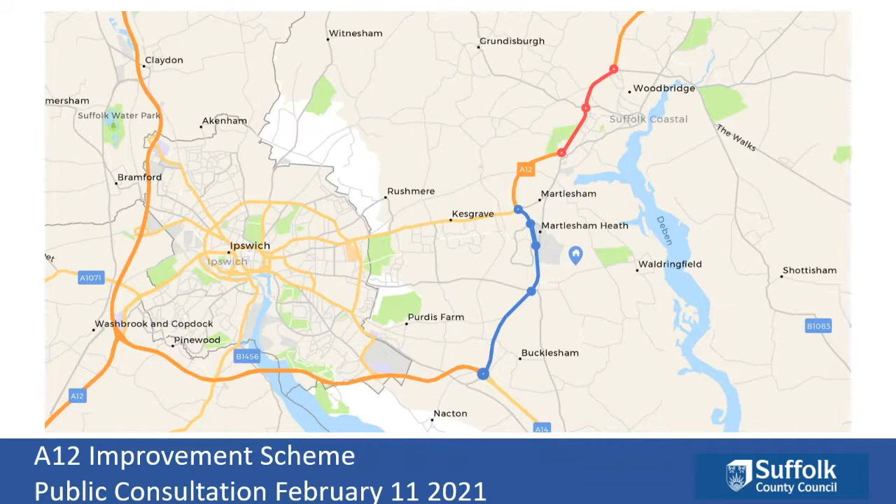So it is the A12 improvement scheme. As I say, consultation started on Tuesday. The A12 is part of Suffolk's major road network. There are a handful of major road network status roads in Suffolk, and they tend to join to the strategic road network. So in this area, it'd be the A14. As a major road network route, it recognises the importance of the route not only for the local communities and businesses, but also the economy, particularly in this area, the visitor economy, and the A12 as a prime access to

the energy coast. So in looking at where to do improvements on the A12, we looked at existing issues and how they might get worse based on planned growth. So we did some modelling in response to recent local plan updates, and it showed that this particular stretch of the A12 that we're looking at in the project, the issues there would get worse. And the obvious question is, why now? You know, this has been an issue for some time, and that really comes down to opportunity.

The Department for Transport, up until very recently, in fact until the major road network was established, there wasn't really the opportunity to put forward projects of this sort of size and cost, and that limiting factor in the funding opportunities meant that looking at schemes like this was not possible. So the current funding for the major road network runs from 2020 to 2025. So that's looking at schemes to be substantially complete by 2025. In 2019, we submitted a number of bids to the Department for Transport, and we were successful in getting development funding for this particular project.

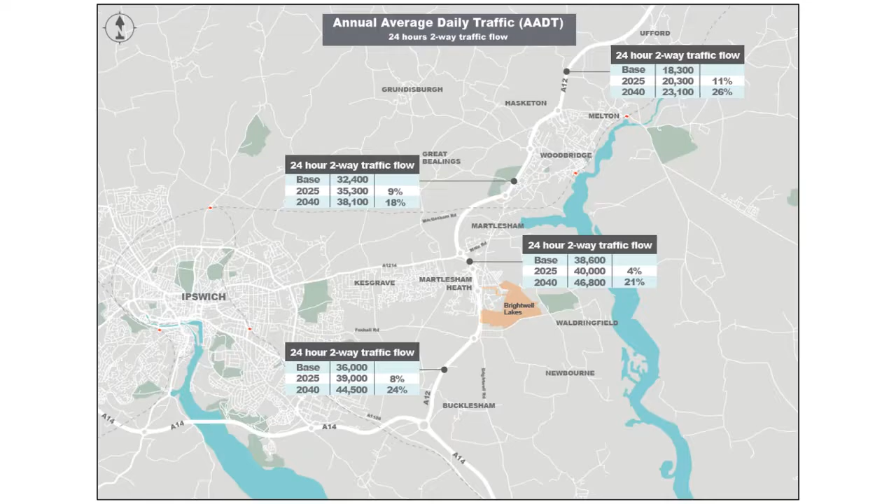So the objectives of the scheme are to improve the capacity of the major road network and reduce its congestion, and that helps improve journey time reliability, which is a key factor for supporting the local economy and businesses, and also recognising the location of this particular part of the route of the A12 relative to the port. So we obviously have Felixstowe, which is very close. There's the port in Ipswich, and less so the port in Lowestoft.

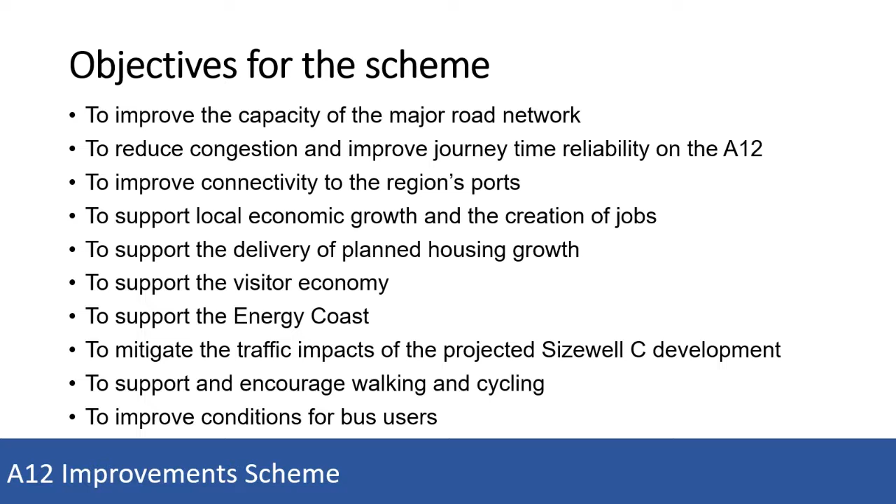Supporting economic and housing growth is a key part of the project, because that's the growth that we're looking to mitigate, and also recognising that this route is very important for the visitor economy and for the energy coast, looking at the number of wind farms that are coming forward, and also if Sizewell C is approved, the potential impacts of the increased traffic associated with the construction of that development. However, this isn't just about roads, and what we're also looking to do is to improve walking and cycling connectivity, to improve sustainability options for travel, and also to look at improving conditions for bus services and bus users.

So what is the scheme? There's a total of 8 junctions and one section of carriageway that we're looking to dual. But if I start at the south end first, the A12/A14 junction, which is Seven Hills, is the first junction, going up then to Foxhall Road junction, and then to Barrack Square, which is the BT junction as we call it locally, and then to the Anson Road junction next to the large Tesco's, the A1214 Main Road junction

I will come to the sustainable measures and the locations of those separately, but initially we're going to be looking at the A12 junctions. So the approach we've taken is a corridor approach. So we've been looking at providing consistency in design. This is important not only for safety reasons, but also it improves the efficiency of the route. Also, we've been looking at proportionate improvements. So it's not what ultimately completely solves the solution at each junction, because that would have a tendency to over-engineer the junction. And we need to be mindful that going forward, we do want to be increasing the level of sustainable travel. So it's about having proportionate improvements that can accommodate the traffic and manage the traffic.

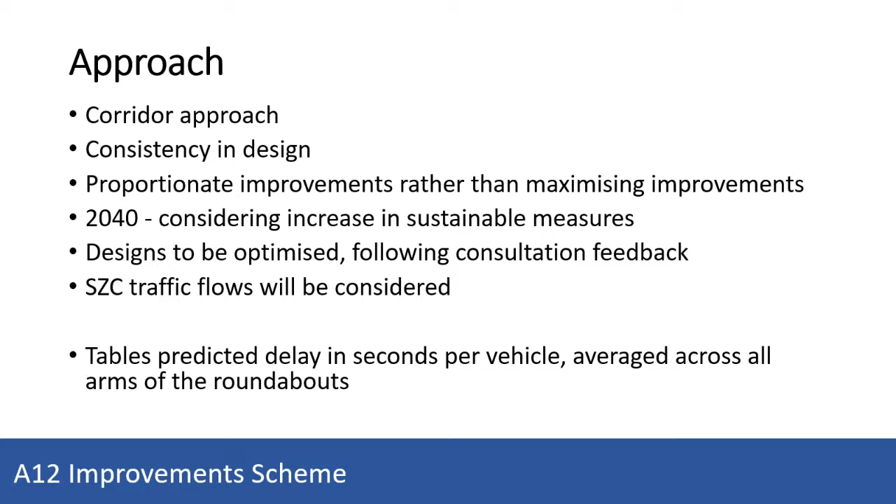Now I'm going to go through each of the junctions in turn, and on each slide there will be 2 tables, one for the AM peak and one for the PM peak. And what those tables will show would be the predicted delay in seconds per vehicle. Now that's not by arm, it's averaged across the whole junction, so some may experience a little bit more delay, others significant improvement. So if I move on to the A12/A14 junction first at Seven Hills.

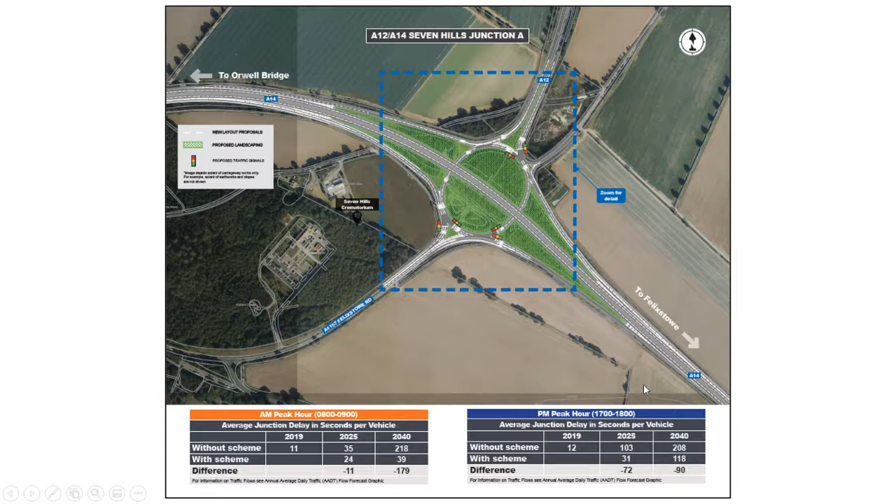On this junction here, we're going to have a free flow, which I'll be able to show in a bit more detail. And as you can see, AM and PM peak per vehicle, bearing in mind that the number of vehicles are going to increase over time as well, show definite benefits in 2025 and 2040. 2025 is our estimated year of opening, and 2040 is what the Department for Transport require us to model to assess future impact, to show that there are longer term benefits than just the opening year.

So if we zoom into this area, you can see we've increased the number of lanes on approach and within the circulatory area. We're not doing anything to the existing structure, but we are putting in traffic lights to be able to manage the flows. And on this one, as I said, from Felixstowe coming down, the idea is you'd have a free flow going down into Felixstowe Road. Now, I think I'm aware, before we even started the consultation, actually, that the idea of traffic lights is going to be controversial. However, the reason that we've ended up at this, and we have looked at a number of options for each junction, is that traffic lights help manage flows.

So they are particularly useful where you have an imbalance of flows, and you tend to see imbalance where there are queues back on specific arms. So here, where you get queues back here, here and here, that demonstrates that there's a need to balance those flows, and the best way to do that is using signals.

In using traffic lights, we would make them MOVA, which means that they are intelligent within the junction itself, but also those junctions that are within the right proximity to each other, we would also look to link those so that you get the connectivity of flow between the junctions.

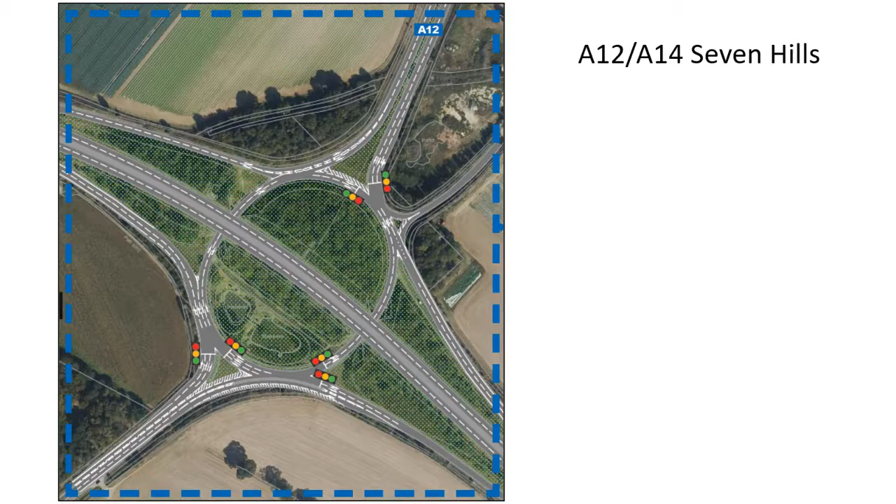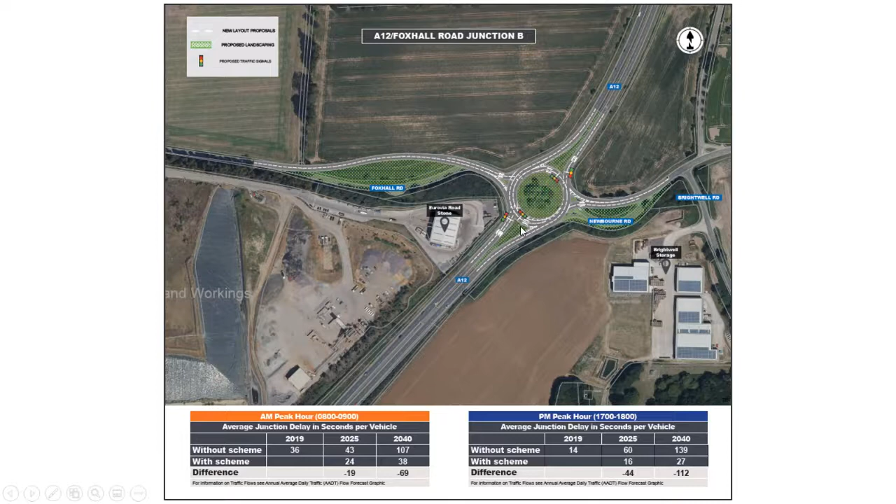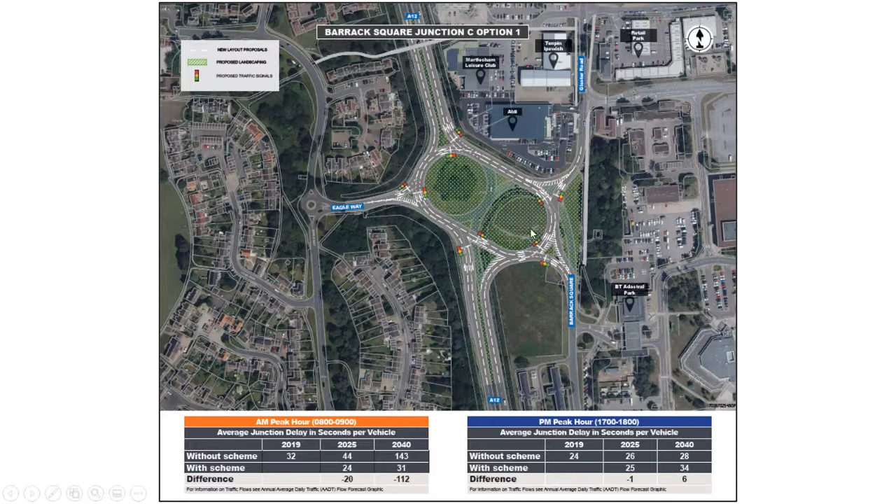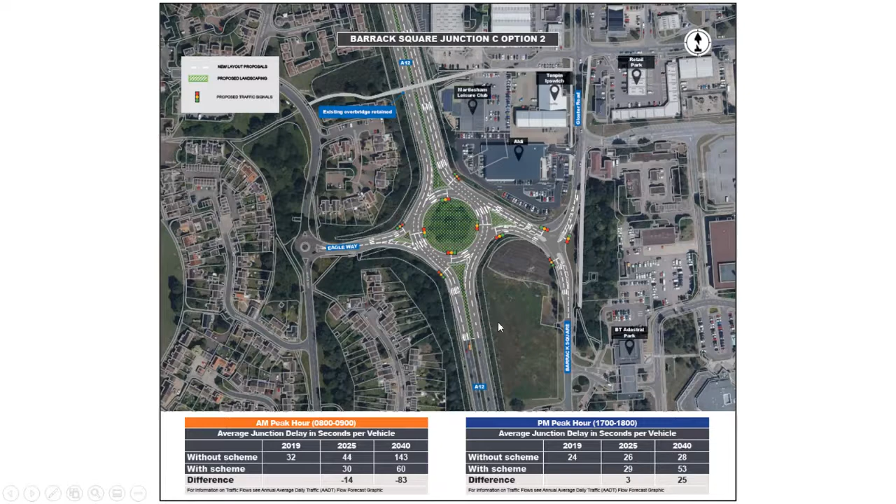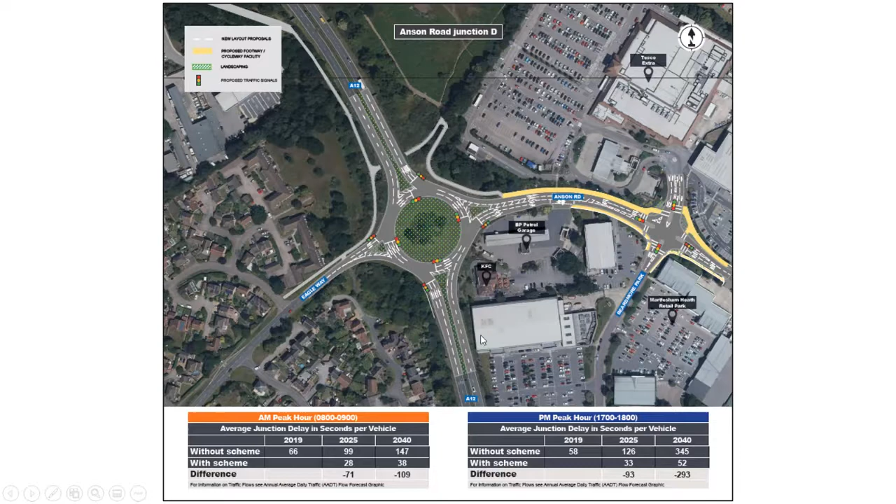And what we found here is there's a real need to consider these two junctions together. Those that live locally and use this area are aware there's quite a lot of congestion, particularly on Anson Road, associated with how this roundabout works. And so what we're looking to do is two things: to signalise this roundabout, which provides the benefit of better crossings for pedestrians, but also then we'll be able to link that with what we're doing here, which is again increased capacity on approach to the junction and signals.

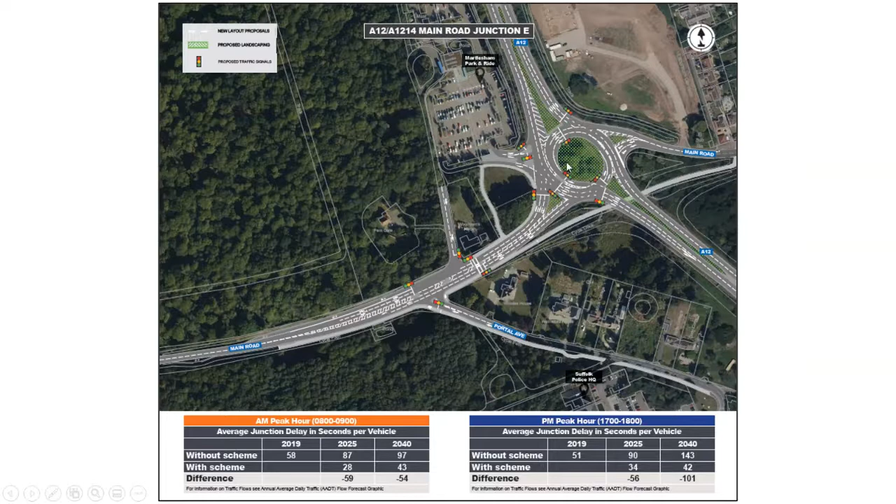This is quite a complex junction because it's got 5 arms, which are notoriously difficult to manage. We found that the only alternative to this really was to go mega, which was to have a grade separated junction or something called a throughabout. A throughabout wouldn't really benefit the local traffic, but it'd be excellent for the A12, but we didn't feel that was a good balance. So we've come up with this proportionate approach, which does again show benefit in the 2 peak periods.

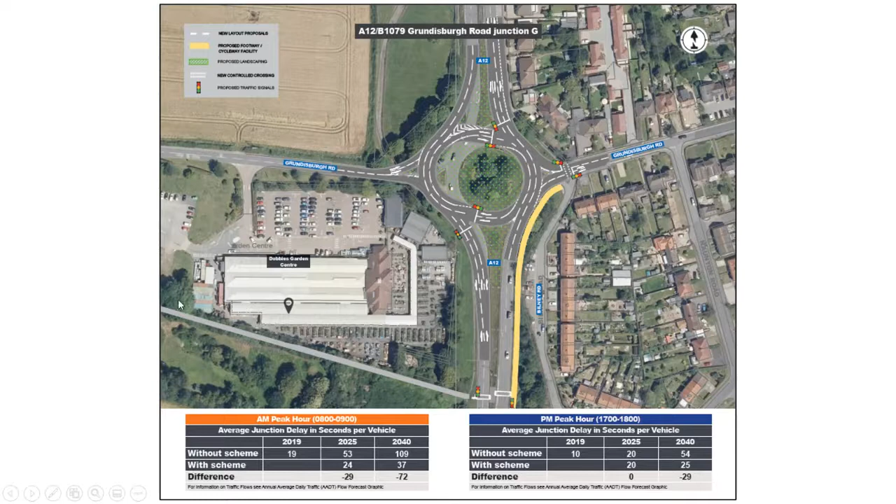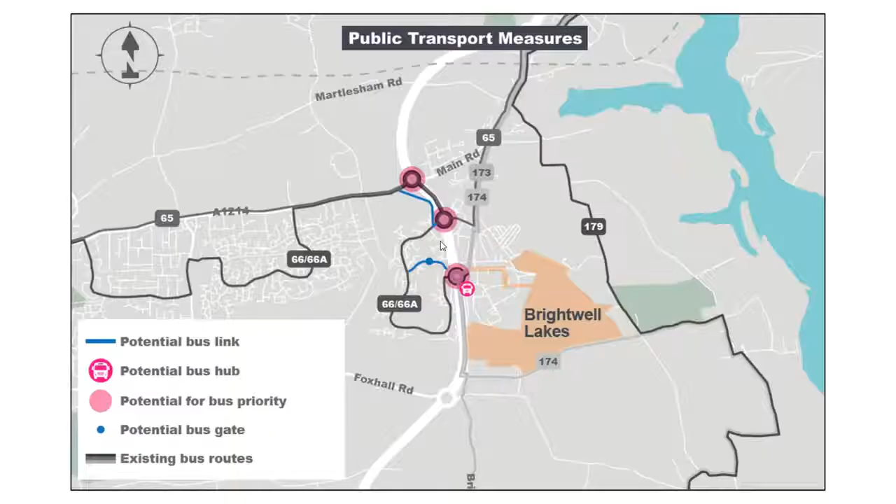So Junction F, A12 North Outer Lane. So Junction F is the Seckford roundabout, A12 B1438. So the North Outer Lane will continue to be used by those fast tracking queues on the inner lane. Can this be avoided? Sorry, Sam, again, another one for you. Yeah, so I think this is about the vehicles on the right-hand lane coming down the hill in front of the football club and using the right-hand lane to carry on along the A12, and you can use both lanes to do that. There's not really a way to stop that. It's a two-lane entry into the roundabout, both of them straight on, and that needs to be retained for capacity reasons. So there's no way to avoid that, really.

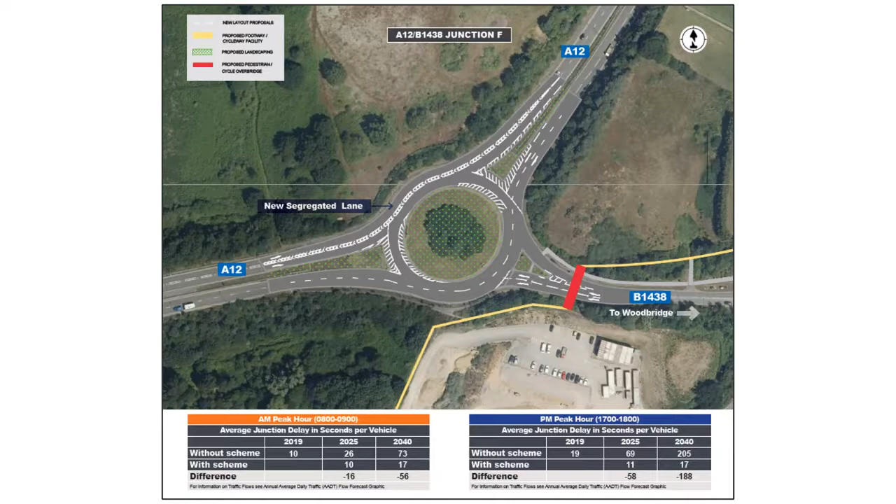Oh goodness, sorry. It's gone. Right. Okay, just waiting for another question to come up.

Okay, so whilst I can see the philosophy from an environmental perspective, stopping and starting at traffic lights generates high levels of air pollution, can more dedicated slips be incorporated, for example, A12 North at Junction H? Okay, so you're saying at Junction H, which is the Woods Lane junction, to have free flow going north, and this is something we are currently actually looking at, but it's not as obvious as it first seems. You are right in that traffic lights do stop, but they manage flows. So what you get is rather than say two arms not experiencing any delay and probably feeling there are no issues with the junction, those on the other two arms experience significant delay and possibly stay in that queue idling for a lot longer than they would do at traffic lights. So the idea, as I said at the front end of the presentation, is to balance those flows.

Sorry Steph to put you on the spot, but is there anything else that's worth just picking up in terms of delays at signalised roundabouts rather than just free flow roundabouts? Yeah, I think, as you say, the intelligent nature of the traffic signals that we're looking at for these junctions along this stretch means that they detect traffic on the approaches, which attempts to minimise the overall traffic delays across the whole junction. So I think we need to look at it in terms of the intelligent traffic signals that would be used rather than a fixed time to the traffic signals, which would potentially lead to increased delays. These would be done in an intelligent way with loops in the road to detect the traffic and manage the levels of traffic accordingly.

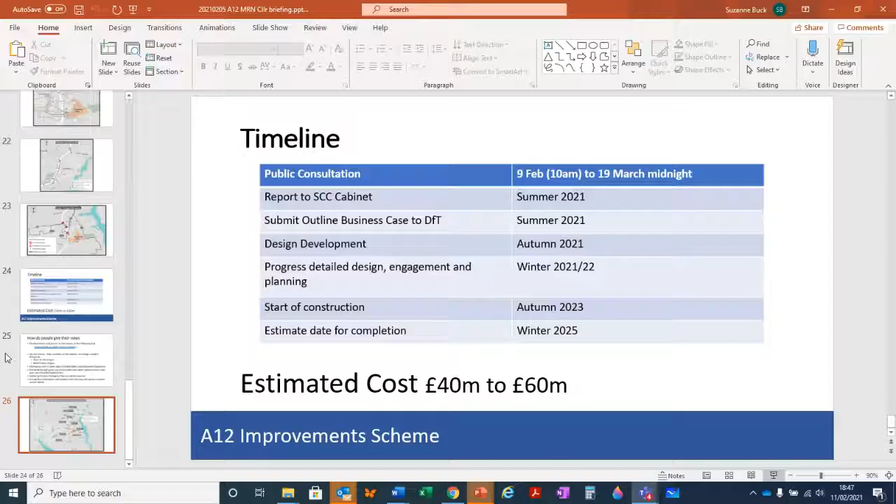Oh, for goodness sake. Okay. Right.

Okay. Is there a possibility of using part-time lights on the major junctions to control at peak times only? Again, this is quite an interesting issue. So as Steph was saying earlier, using MOVA gives you that flexibility in how the traffic signals work. So it's not a fixed time rotation of the lights. It monitors where the traffic is coming from and adjusts accordingly.

Part-time signals is something that we are looking at the moment, but they are not always particularly good on safety grounds. People can get confused as to when they are on or not. But it isn't something we've ruled out. But at the moment, we are looking at MOVA, at the intelligent signals, as a way of managing the flows rather than part-time.

Okay, at junction E, which is the A1214 Main Road junction, has any consideration been made to allow for the increased traffic expected for the recently constructed Brethren Hall off Main Road? So the traffic flows within the modelling that we've done have taken on board all the growth in the local plan model, and I believe some background growth as well. But if I can pass to Michael Johns from WSP, he's our modeller, to explain what we've considered in terms of future flows.